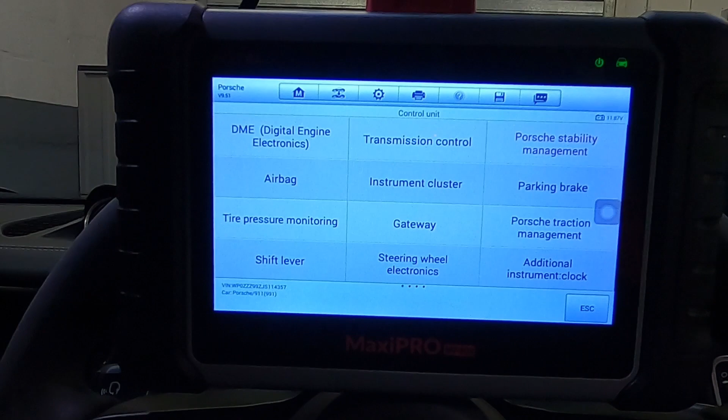First things first, best thing to do is just run a quick diagnostic check on the engine, make sure there's no faults on the engine, which would affect the performance and not be the best thing to do to run it on a dyno. So make sure there's no faults on that.

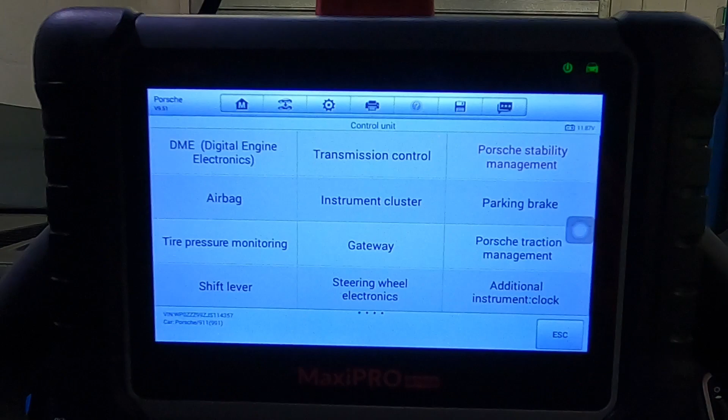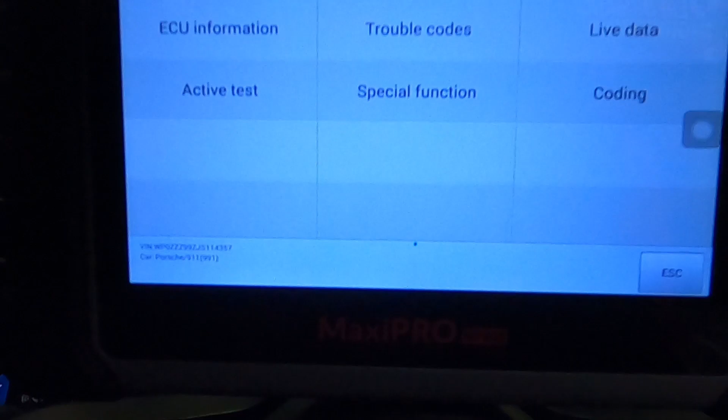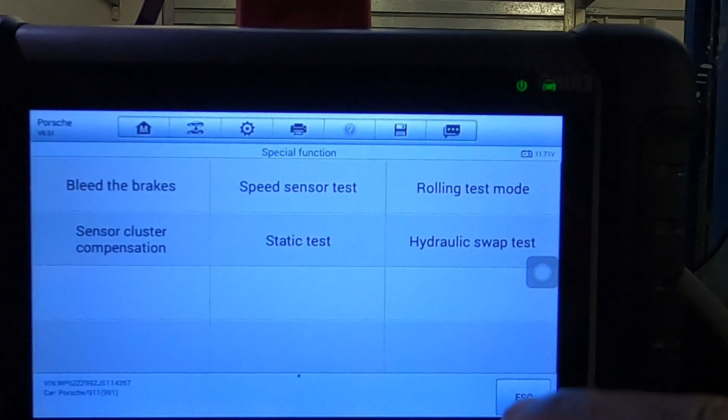Then what we're going to do on the Porsche is run it into a dyno mode, so Porsche stability management. Just a quick heads up, what we're using for this is the Autel Maxi Pro MP808. So Porsche stability management, special functions, and then you can see here rolling test mode, which gives you a couple of options.

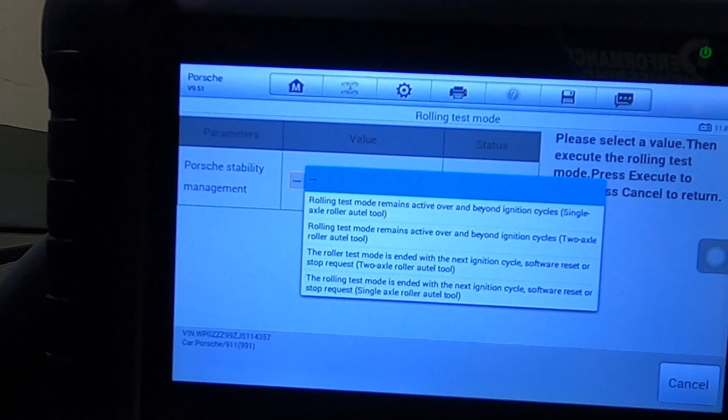So first option is what we need: rolling test mode remains active over and beyond ignition cycles for a single roller. So we'll press this, press start, and there you go, dyno mode active.

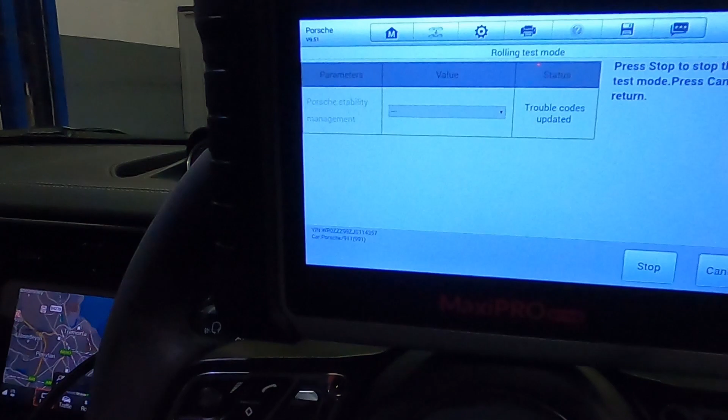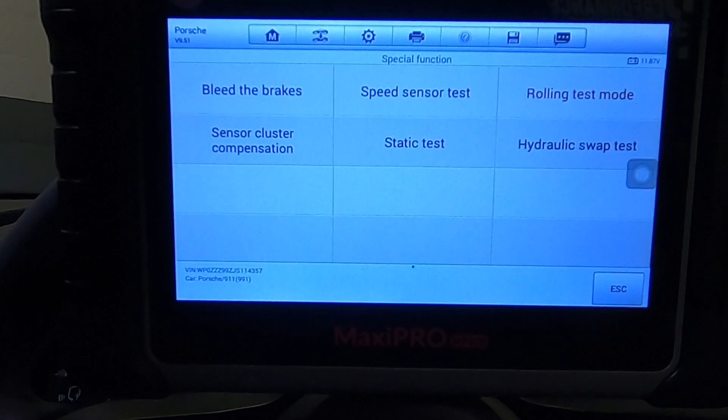So basically with the dyno mode active, it should disable all the ABS units or sensors, because obviously the rear wheels are spinning and the fronts are not, which plays havoc with the ABS sensors. But once it's in rolling road mode, it should be perfectly fine to dyno.

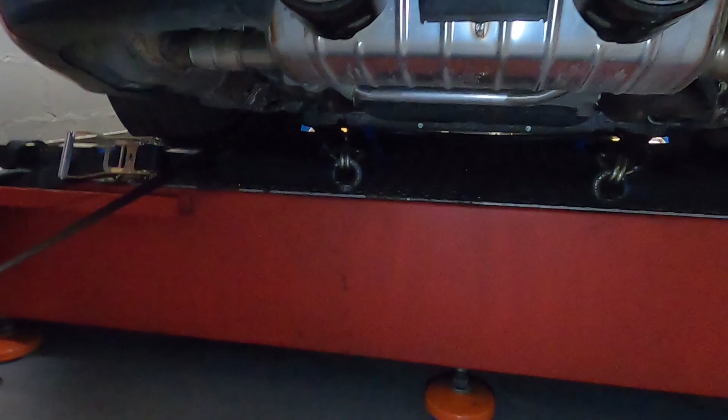So the car's all strapped down to the dyno. Basically the car's strapped down diagonally, so we've got one feed to there, and then another feed there to there. That should just stop any lateral movement. And then we've also got another anchor point there, and that should just stop the car from riding up on a front roller, giving slightly inflated torque figures.

And then we've also got two very powerful fans feeding the intake systems in the lower part of the bumpers, and then the main fan is at the front, but the airflow should flow over the car and feed the main air feed there.

Last thing to do is to set up the engine speed and dyno. So basically we're going to dyno the car in 5th gear, because that's the closest one-to-one on this PDK box. And we're going to get 3000 RPM on the engine in sync with 3000 RPM on the dyno, so they're both in sync.

So now we're about to do a couple of runs. Car's all set up, we've got the dyno and the car all in configuration and in sync, and then we've just got the usual lights up on the dash when you run it up in dyno mode. Again, you can still see dyno mode here.

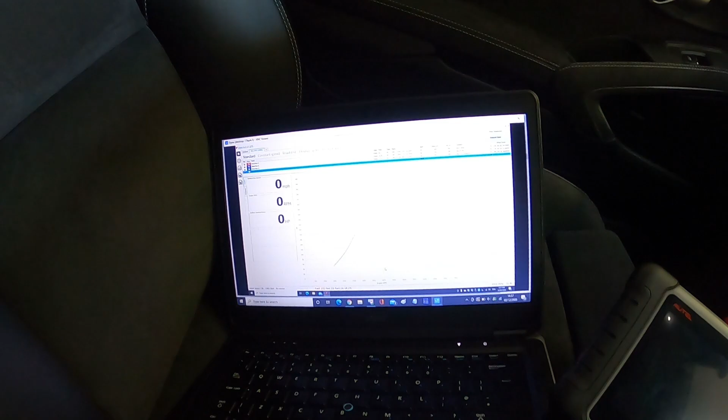Then we've got the runs here, the data. We'll just monitor intake temps, just to make sure that they're all okay. But now it's just a case of driving off up into 5th gear.

We're in 5th gear now. We're just going to keep our foot down all the way to the end of the red line, and then push straight into neutral, and the car will do the measurement on the transmission losses on the coast down.

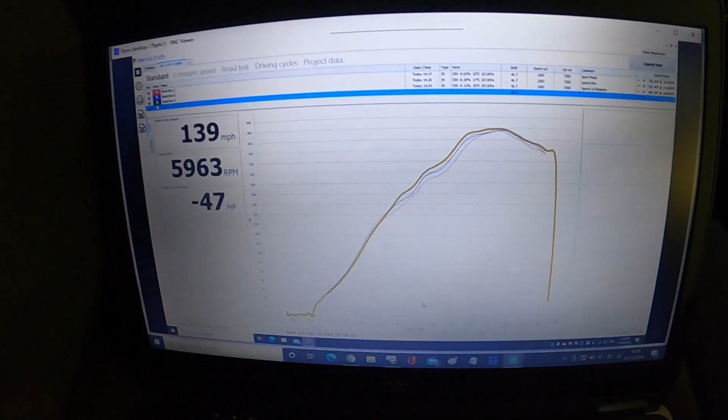There you have it. Don't know if you can hear me, but the car sounds incredible. Got some runs there, so that's telling us our speed and the engine speed at the moment, and the bottom one is the transmissional losses, and that's the graph.

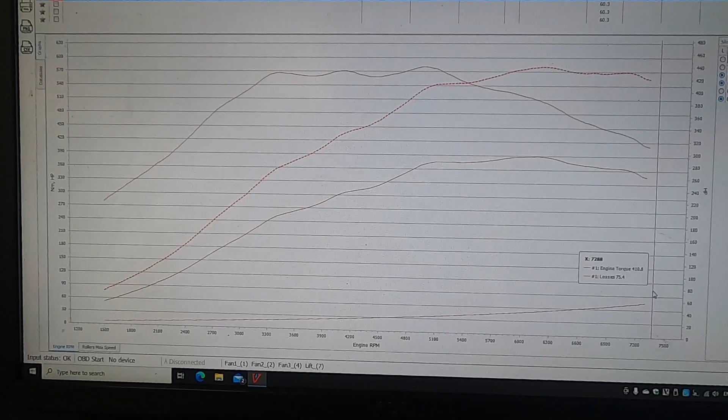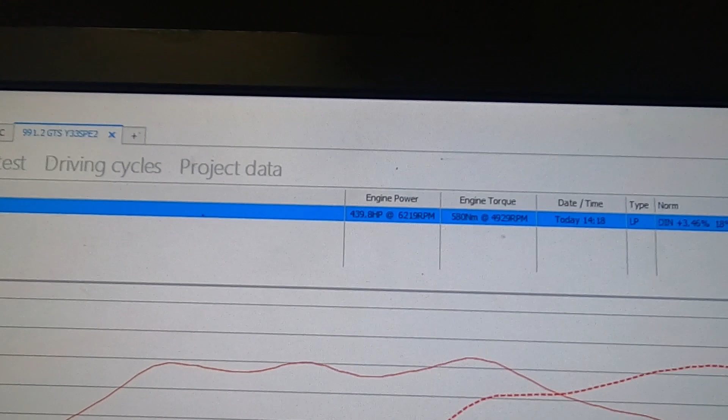Results are in, and the GTS did pretty well. For a standard car, it did very close to standard figures. In terms of power, it did 440 horsepower and torque was 580 newton meters. Factory figures should be 444 horsepower and 550 newton meters, so 4 horsepower down on power and 30 newton meters over on torque.

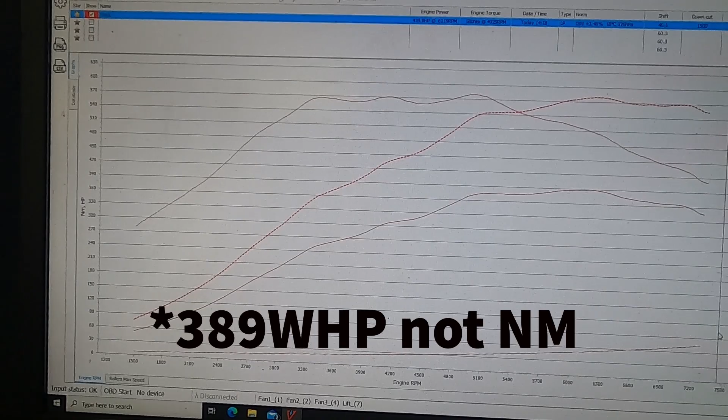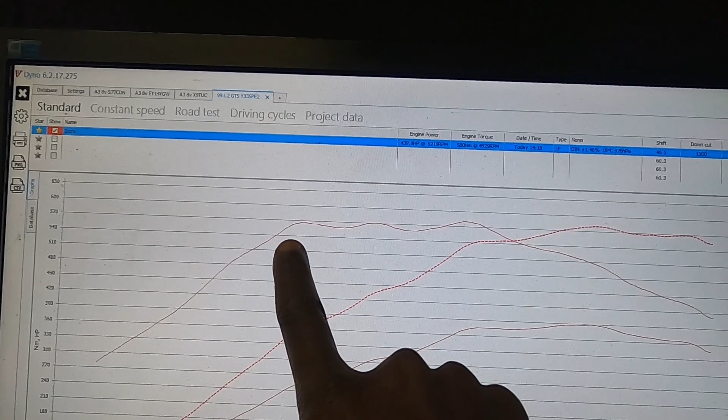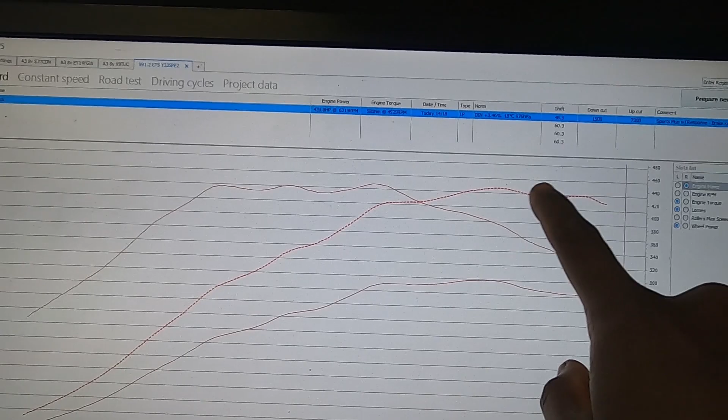We also had a peak wheel power of 389 wheel horsepower, so not too bad. You can see the torque curve, which is obviously in relation to your boost, isn't the smoothest, but for what it is, it's not too bad. And around about 6,300 RPM, the power curve just flattens off a little bit, but for a standard car, pretty happy with that.

Video's near enough done now. Hope you enjoyed seeing our GTS on the dyno, hearing it too, and just seeing what a standard GTS typically does. We run it on 99 Shell V-Power. If you run it on 95, which you should never do, expect to see a little bit less. But yeah, for what it is, happy.